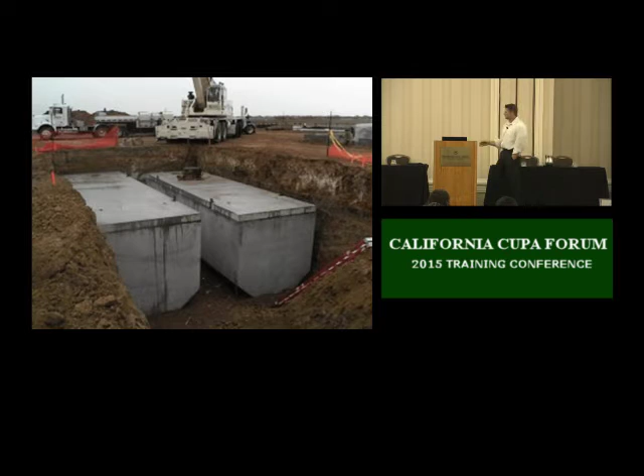So one of the things we want to look for is what it's made of. These are concrete. Can anyone tell me what this is? This is an underground storage tank. When you look here, this is the ground. These are buried tanks. Now, how big do you think these tanks are? I think they're about 2 million gallons.

Do you know what's stored in these underground storage tanks? Not jet fuel. Jet fuel is so much more mundane than this stuff. What is this? Nuclear waste. These are nuclear waste tanks.

Underground storage tanks, about 2 million gallons each. And they've only leaked, there's 174 tanks, I think, like this, in this one area. About 174, each about 1 to 2 million gallons, and they are all full of highly toxic nuclear waste. But out of all of it, they think they've only lost like 4 or 5 million gallons released. And it might sound funny, but it's 100% true.

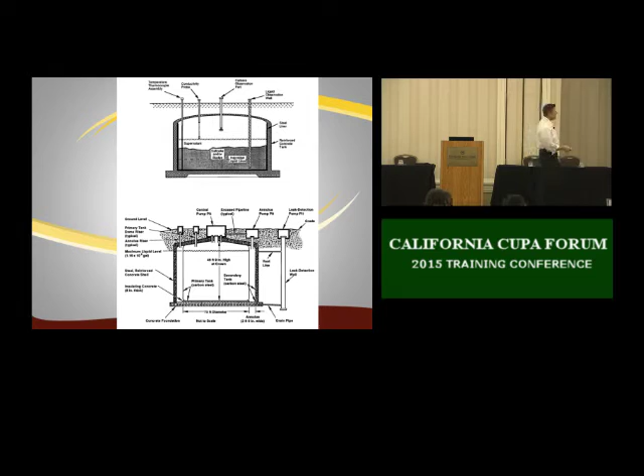One thing you need to look at when we're talking about underground storage tanks is why do we have these regulations? Because of things like this - and it doesn't have to be highly toxic nuclear waste, it could just be oil and gas, but they leak. They get into the water supply, people drink it, people get sick. Any questions? All right.

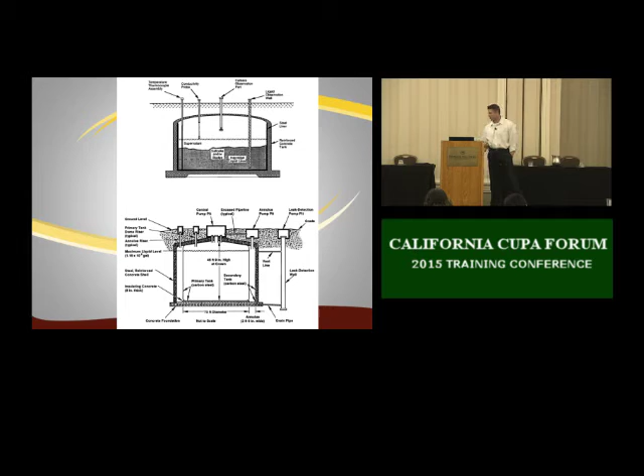So now here's our little diagram. We're going to go over components of everything. So right now we've talked about underground tanks, we talked about the reason we're here, we're talking about what we're going to look at now.

Now we're going to look at more tanks, apparently. Okay, what kind of tank is this? Steel tank. How do we know it's a steel tank? Because it says steel tank. What else? No ribs and flat ends. Okay, so it has flat ends, there's no ribs on it. That's great when you put the tank in the ground.

However, when you go to a new site and you look down, how do you know what kind of tank's in the ground? You trust what forms? The tank forms - never, ever, ever trust a tank form. Okay? If you ever trust your tank forms, you should be let go, you should go do above ground tanks instead. They are like 85% wrong every year.

So if you go to a site that's in the ground, you can't see flat ends - how do you know this is a steel tank? When it's buried and you can't see flat ends, how do you know when you're looking in the hole down in the ground that it's a steel tank? Do you trust your tank forms? No? Thank you. How do you know? Well, that's a whole separate issue - how do we know this is steel?

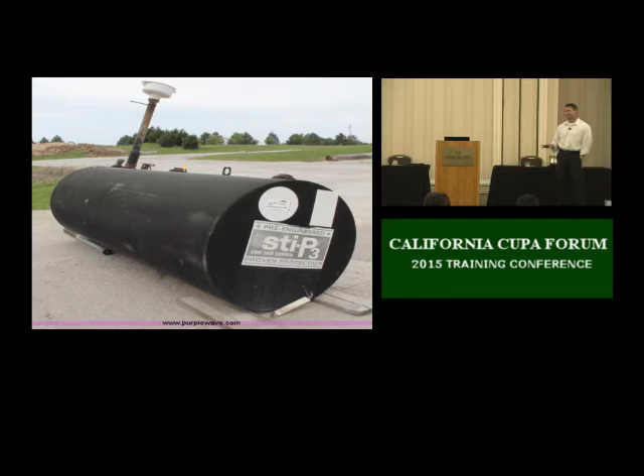Glasteel tanks. This is a Glasteel 2 tank. And what's the difference between a Glasteel 2 and a Glasteel 1? Who can tell me? Or do we even care? Glass steel, there's 2 different kinds of tanks. There's a glass steel 2 tank and a glass steel 1 tank. What's the difference? Some of my senior people, what is the difference? Before I start calling you out, and I will start calling you guys out. You guys have been in my class for years. I've talked about this many times. What's the difference between Glasteel 1 and Glasteel 2?

One of them has a steel primary tank and a steel secondary tank. One of them has a steel primary tank and a what kind of secondary? A jacket tank, a fiberglass jacket. Okay? Why do we care?

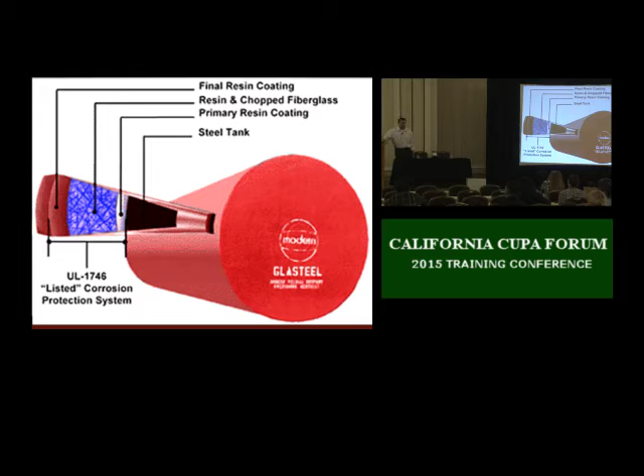Corrosion, because on the one with the secondary tank that is steel, it has corrosion prevention, but it also has a wrap around it, so it doesn't matter, right? Because the steel tank, the secondary steel tank, has a fiberglass wrap around it, so that is the corrosion prevention method. However, when that tank comes on site, what do they have to do? They have to do a holiday test. And with a jacketed tank, they don't.

Okay, what is a holiday test? Who can tell me what a holiday test is? It's a test to determine if they have complete protection. And how does it work? Yeah, it's a corrosion prevention method test that shows, hey, do you have any holes in the jacket or the fiberglass wrap? How do they do it?

They run a squeegee. It looks like a giant squeegee with metal. They put about 20,000 volts across it, and they're supposed to cover the entire area of the tank. But this particular squeegee, if there's a spark, they don't have a good— Ah, there's the big word. What's that big word? Spark test. So you're taking a tank that has fuel in it and you're sparking it to make sure there's no holes in it. Better not have fuel in it when it's delivered. What was that? It better not have fuel in it when it's delivered. Very good. This tank has not had any hazardous material or anything volatile in it, so you're good.

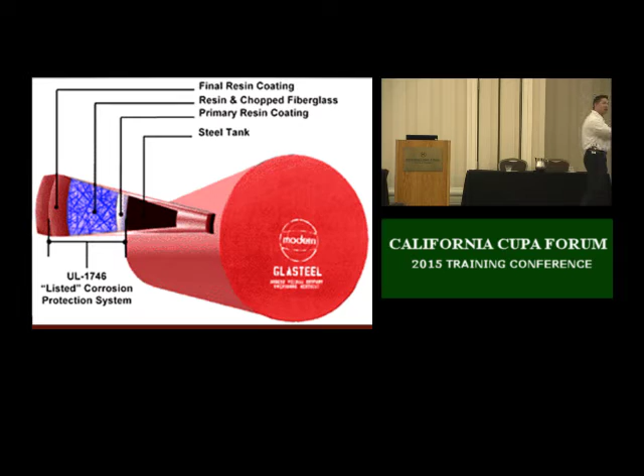You're very good. Yes? Another thing, I think that tank, that double-wall steel tank, it's in the Enviro 16. There is one like that too, but on Glasteel, there's Glasteel 1 with Glasteel 2s. There is a different, that's a whole different company. There is though, you're right. Modern makes an Enviro, it's Enviro 16. It's a double-wall steel. Okay, I have to check on that. I have to see if they changed the name. All I know is I know the glass steel 1, glass steel 2s, there's a difference. Okay, but they could have changed the name or may have another one that's Enviro. I have to check on that.

Now, going back to some more things about a spark test. When do we see spark tests at different places? When's another time we see a spark test? With underground storage tanks. Lining inspections, lining inspections. And we're not going to talk too much about lining here, but understand this.

If you have a single wall steel tank that had a liner put in, okay, what's a liner? It's where they cut a hole on top of the tank, they go inside and they spray this blue stuff or this green stuff inside the tank. Okay? The first 10 years, you have to go do a test, and every 5 years after that, you do a test. And they have to run a series, I think, 8 tests.

And one of the tests is they go inside the tank. Some guy goes inside the tank, and they do a holiday test around the liner to make sure it has no holes. Now think about that. You're going into a tank, into the hole in the tank. You're going inside this tank that already did have hazardous materials in it now, and you are sparking it to see if there's any holes.

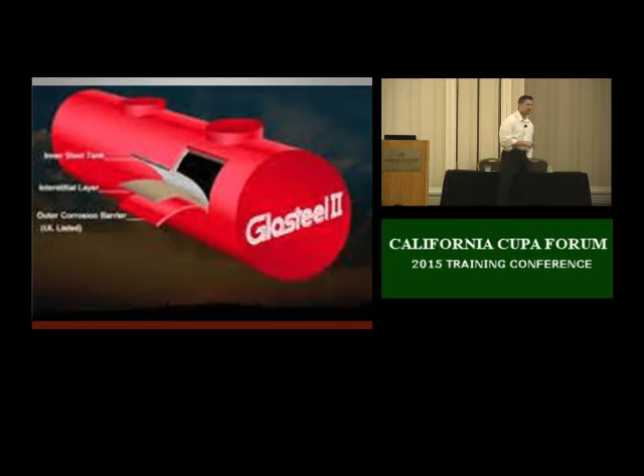As we get closer to this 2025 single wall tank removal requirement, this is what you're going to see.

Is there anyone from San Joaquin County in here? No? Well, if you are, you don't want to be singled out. Okay, you know how many single wall tanks are in San Joaquin County? Zero. Why?

They removed them a long time ago. In what do we call it? The 98 upgrades. How many of you guys know what the 98 upgrades are? And for you young kids in there, that was 1998.

As a side note, I came here when I was like 24, 25 years old, and I saw these old people up here talking about underground tanks and all that kind of stuff. And now, as I've gone more into the industry, I am that old guy up here talking. I look at you guys, you're so young. God, some of these inspectors are so young. So for you young ones, 1998 upgrades, okay?

And what happened in the 1998 upgrades? It said if you had a single wall steel tank, you had to do what? You had to line it or remove it. Okay, and some people said, I want to line it. I said okay, but you also had to do, I don't remember exactly what the citation is, but there's a subpart K that said you have to prove, before you line the tank, that your tank did not what?

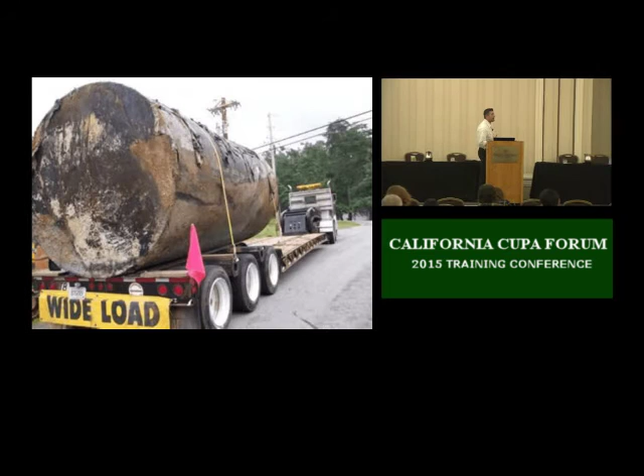San Joaquin, they didn't do that. They took it a lot more literally. They said, okay, you have to prove to us that your tank has not leaked. So you have to uncover the top of the tank and do soil samples underneath the tank. That is why San Joaquin has no single wall tanks in their ground.

Because the people who tried soil samples, what did they find? They all failed. There was contamination under 100% of them. Is that normal? No. I mean, it's typical, but I have pulled single wall tanks out of the ground with no contamination underneath. It's rare, but it does happen.

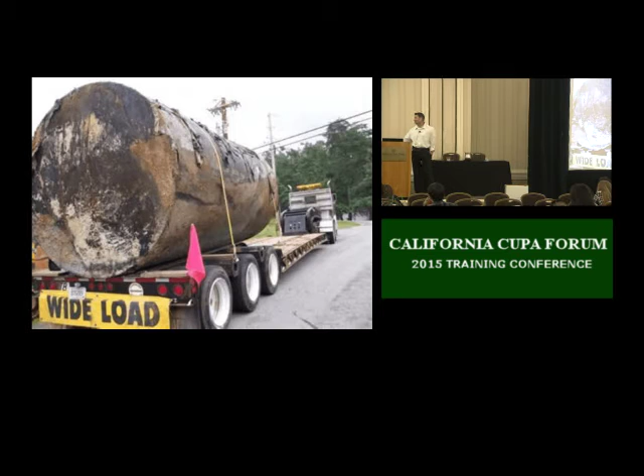It does happen. Typically, when you see more single wall tanks coming out of the ground, you're going to see a lot of contamination, a lot of bad tanks. Okay, fiberglass tanks. This is a fiberglass tank.

We need to move on a little bit. So here we go. How do I know this is a fiberglass tank? It has rounded edges and it has ribs. Okay, now when this tank goes in the ground, how do I know it's a fiberglass tank? Do I trust the forms?

No. Say that again? No. There we go, no, you don't trust your forms. So how do you know? You look inside the hole and you see what? You see ribs. We're good. What else do you see?

Wraparound sensor, or what's the third thing you can see? Hydrostatic sensor, hydrostatic liquid. Any question with that? Should you have hydrostatic monitoring on steel? Why? Because it corrodes.

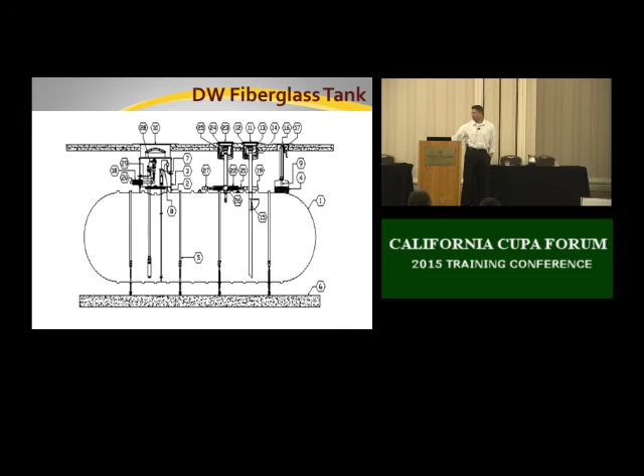Double wall fiberglass tank. Now this is a compartmentalized tank. Understand that when you have two tanks that are compartmentalized, or two different sides, I don't care if this is 87, 91, diesel, whatever. How many regulated tanks do we have here? Two. We have one full tank and two regulated tanks.

Any questions? How big is your interstitial space on a fiberglass tank? An eighth of an inch? Yeah, something like this big. Your secondary containment is about this big on a fiberglass tank.

Have you guys ever gone and taken a tour of some of the fiberglass tank manufacturers? You should if you have not. If you are an owner or an operator, or an inspector, you should set up a tour and have them show you how these things are made, because your tank knowledge will greatly increase.

How do they make this compartmentalized tank? They make a full tank here, they make half a tank, and they just attach it over. Then they take the secondary tank and wrap a secondary tank around both.

What about the ribs? What are ribs? Reinforcement. Why do they have the ribs? For structural support. You put 30,000 gallons of gas in a fiberglass tank - what does the fiberglass want to do? Blow apart, it doesn't have the structural support. You put these ribs around it, and it gives it the support it needs.

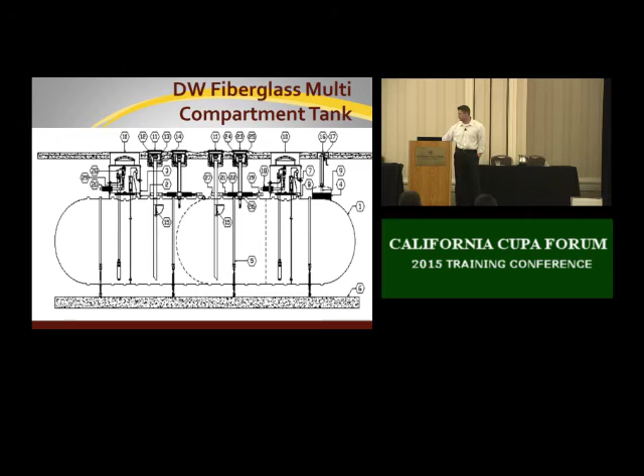All right, so now we're going on to piping. Now we've done with everything with tanks, we looked at everything with tanks. Now we're going to piping. Let's go back here, there we go.

Fiberglass piping - we know when it's in the ground, it's straight. It has 90s, it has 45s, it's rigid fiberglass piping. Any question with this? Typically it's what over what? Fiberglass over fiberglass. What inch over what inch? 3/2. Can be bigger, can be smaller, typically 3/2.

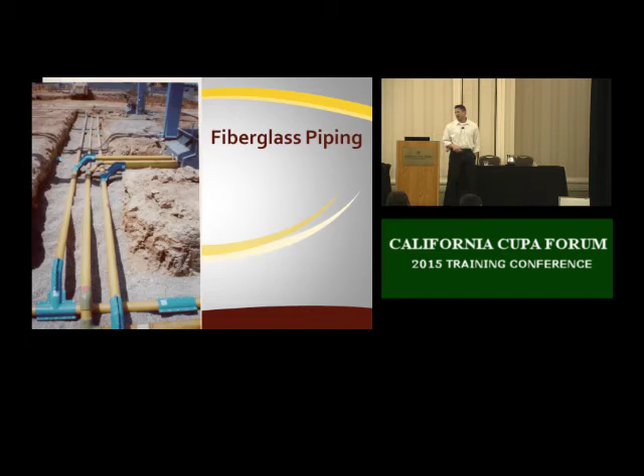Flex pipe - you notice on flex pipe there are no 90s, no 45s. It's just wound about. Now when you're installing this stuff, what do you need to know? What the bend radius is.

Understand what the bend radius is. What's the bend radius? What does bend radius mean? This right here, we're at about a 90% bend radius, right? Is that allowable? Maybe, maybe not. Who tells what's allowable? The manufacturer. Should you check that? Yes, you should check that.

I see this all the time, things that are over 90% or 90 degrees. I see over 90 degrees all the time. You have to ensure this, because once this is covered up, no one will ever know again. When you're installing this stuff, make sure you check your bend radiuses. It's something I see wrong all the time.

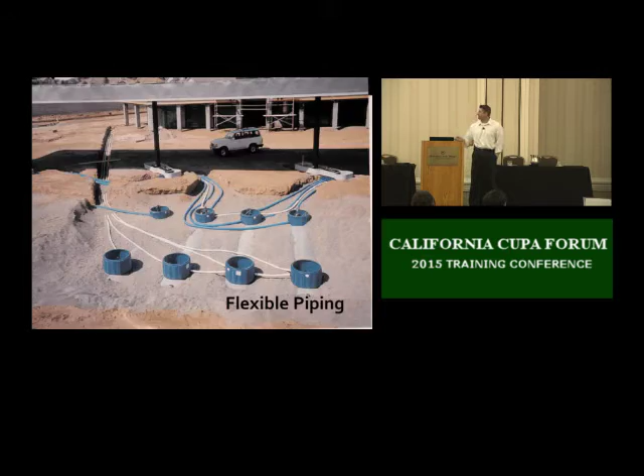All right, this type of system - who could tell me what kind of piping is this? Flex pipe. And what's a special kind of flex pipe is this? What's this system called? The loop system. Loop system. Why is it called a loop or referred to as a loop system?

What's the difference between this and this?

Who can tell me? They're daisy chained together. You have it coming off the sump into the dispenser. Here, you have it coming off of 1, going into dispenser 1, teeing up, going outside the other side of the UDC, and going straight to dispenser number 2, where it tees up, goes into the dispenser, and goes to number 3. So all these UDCs, all these lines are one looped system.

One looped system. Does that make sense? Why is that important?

How you regulate this, and I'm not going to get into too deep, versus how you regulate this, are totally different. They're both flex pipe, but it's regulated totally different because you have this piece of pipe that goes from dispenser 1 to dispenser 2, and another piece of pipe that goes from dispenser 2 to dispenser 3. Because of those loop areas, the way you regulate it, whether it be a VPH, a tank installed after July 1st, 2003, or a non-VPH, you regulate them totally different.

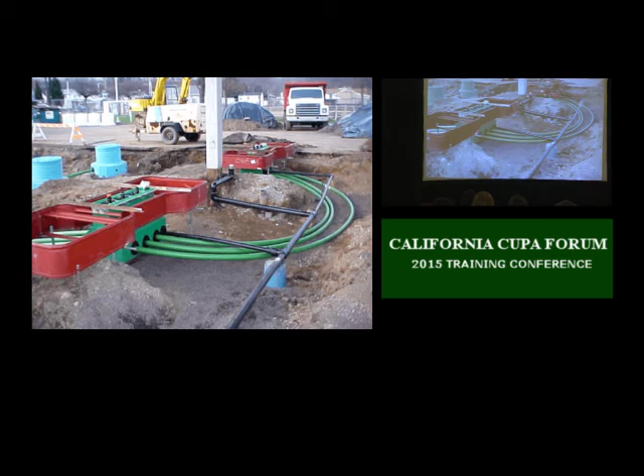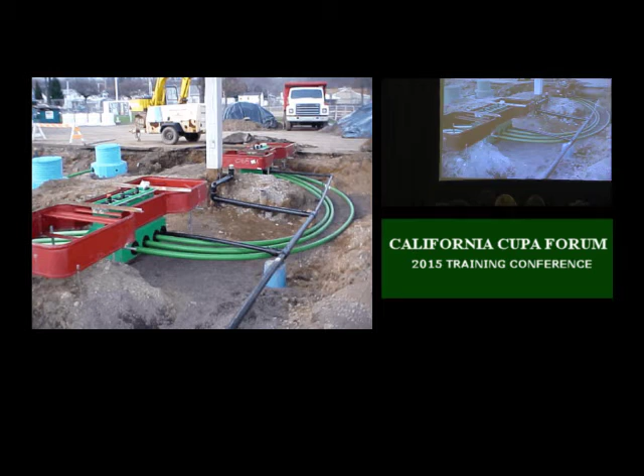Okay, so you need to know where the flow is going, you need to know where the angle is going, you need to know which one's doing which. But these have to be positive shutdown and fail-safe to meet that requirement. Any other questions? Did I lose anybody? I know I lost my beginning people, but for my more advanced people, did I lose you?

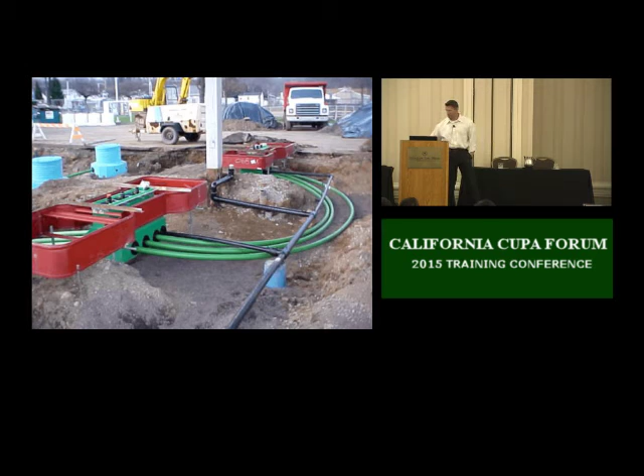All right, what's this called? Trench liner. Should you have this? No. If you have it, remove it. It is illegal, it is illegal, it is illegal. Any questions?

Should you see this in the field? No. Are you going to see it in the field? About 8 of you will, because I know of 8 sites still in California that have this, and it is over 11 years non-compliant.

What's a typical fine for violations on underground storage tanks? $500 to $5,000 per day per tank. Okay, say this is a typical 3-tank install. You go minimum, so $500 a day minimum, 3 tanks at $1,500 a day for 11 years. How much money is that?

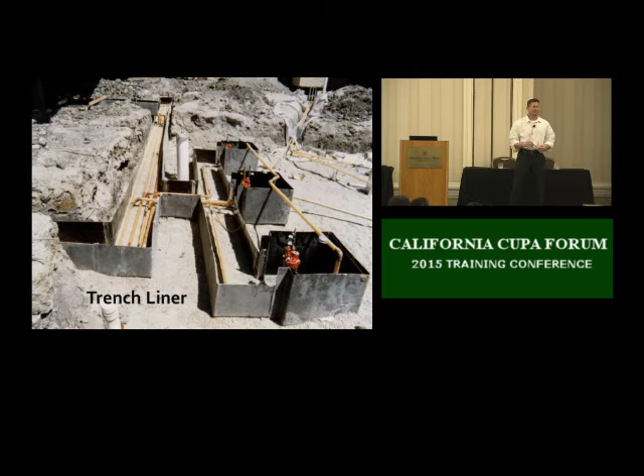Now, if you're local, I know people say, well, my local is fine with it. Okay, that's fine, you got a grace period. However, who can come in and still do a case against you? The feds? Well, actually, it's not a federal requirement, so they can't. The state can. And what do they say? Oh, my local said it's fine, they signed off on it, it's all good. And the state says, yeah, that's nice, however here's your $6 million fine for 11 years at $1,500 a day. Locals cannot give you an exemption for a state requirement.

Now, more piping. These are sumps. Why do I call them piping? Because they are piping, they're big pieces of pipe. Don't think of them as sumps, think of them as 48-inch pieces of pipe, because that's what they are. They are big pieces of secondary pipe. Any questions?

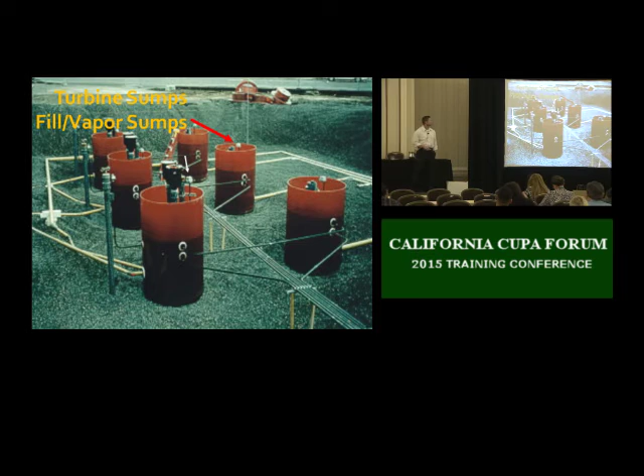When I started with Sacramento County, they didn't give me a lot of training, so when I went to my first site, I just watched what the service tech was doing, like, oh yeah, everything's good. I went to my first suction system, and there was no turbine. I talked to the service tech, I'm like, hey, so where's the turbine? And he goes, well, there's not one. I'm like, oh, okay, that's great. Then I'm like, so how is the pressure working? He's like, it's a suction system. I'm like, okay, great. So then I call the other 4 people on the team, and I said, what is a suction system? What are the requirements of a suction system? And they're like, we'll talk about that when we get back into the office.

So I go back to the office and I bring one of our senior inspectors. I said, what's the requirements of a suction system? What is a suction system? And he said, basically, it's where the fuel gets sucked instead of pushed. I'm like, okay, that's great, thank you. So what are the requirements of a suction system? And he's like, well, let's look. So they broke open the regulations, and they're like, no. Basically, because they had dealt with everything that my team typically dealt with, which was major oil, all double wall pressurized. They had 4 people doing major oil, and they gave me the whole county that was not a convenience store. So I had backup generators, construction sites, everything that was not a major oil site. And I came across a lot of these, and I had to kind of teach myself, and I hooked in with 4 or 5 really good service techs and had them teach me what to do.

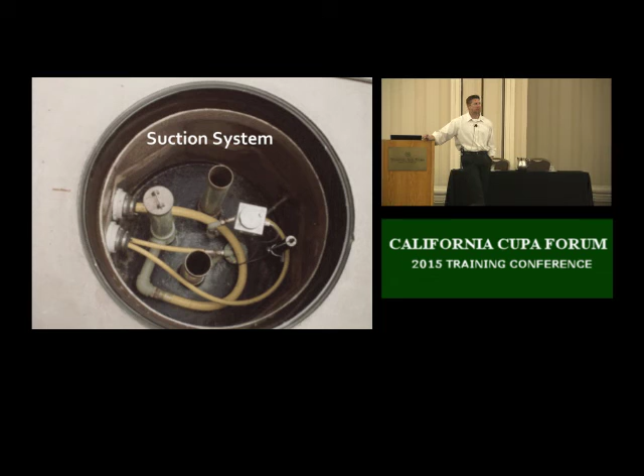Any questions with that? What happens if this was a conventional suction system? Say this supply line here is conventional. Do you have monitoring requirements for it? Yes, you do. Do you have to do secondary containment for it? Yes, you do.

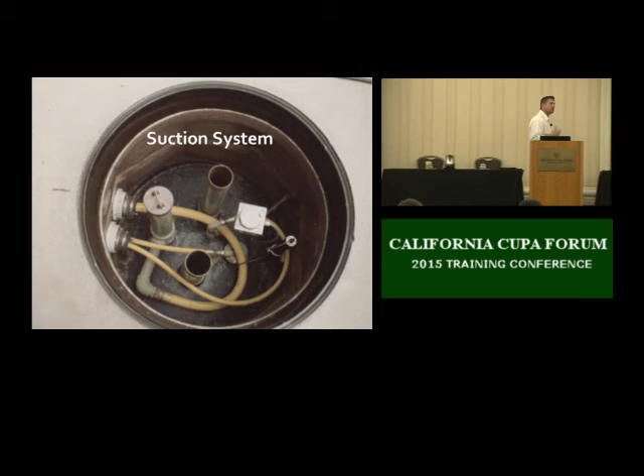So now if I'm a backup generator with a conventional suction system with a return line, and I want to get out of secondary containment testing because I know I'm going to fail - I'm a big corporation with a lot of backup generators, 90% are going to fail - what do I do? I pull out the foot valve or inline check valve of the conventional suction system. That makes it safe suction. I remove the return line, and now I've taken a double-walled conventional suction system that required secondary containment testing and turned it, with those two steps, into a safe suction system with no return line and no secondary containment testing. Boom, I am done. Is that a lot cheaper? It's a lot cheaper. Any questions?

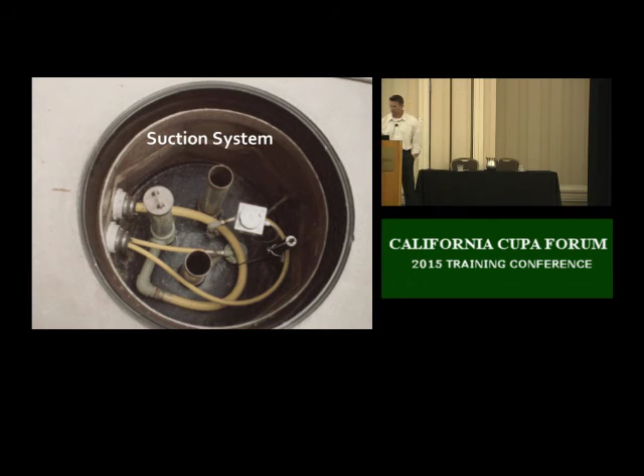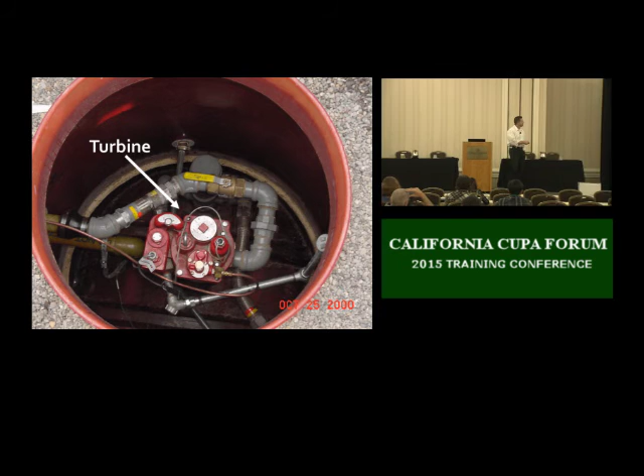How do I know this is an electronic line leak detector? Because I trust my forms? No. Then what? Because it has a wire going to it. If it's a mechanical line leak detector, there's going to be no wire.

All right, so now we've done tanks, we've done a little bit of piping. Now here's more piping - what kind of piping is this? Move, tell me real quick. Double wall, fiberglass, rigid. Okay, double wall, fiberglass, rigid - that should have popped in your head the first thing you saw.

What is this thing right here? Test boot. What do we use test boots for? For testing. I like that. Yes, for what kind of testing? Secondary containment testing.

Now, before 2001, 2002, 2003, if I saw this on a system, I would say, what are you up to? I go to the owner operator - you are messing with my system. Why do you have that boot there? Cut that boot off. Cut that thing off.

Why? Because there's no need for it. There was no need for this testing boot. The only thing you could use that testing boot for was to put it on this piping and then have no monitoring. Does that make sense? Back in those days, there was no need for this boot except to mess with the system by putting this on here and isolating that pipe.

So my sump sensor here never got activated. Does that make sense? So if I saw this back in 2000, 2001, I'd go to the owner operator and I'd have a little talk. Hey, what's going on with my system? Why do you have this boot here? You're messing with my system. As soon as I leave, I know you're putting that thing back on. Okay? Why does every site have them on now?

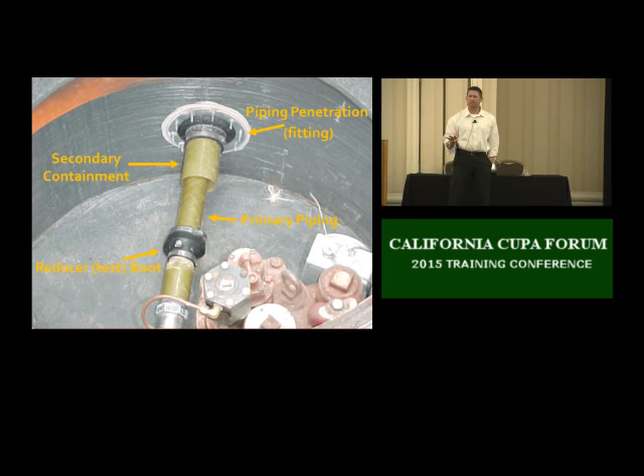They go back and look down, and the fishing bobber has moved one circle. Is that a pass or a fail? It's a pass. I think three circles is a fail, correct? Two or three circles is a fail, something like that. And you know, I've looked at that system - it's a very, very accurate mechanical system.

But there's a huge room for error. And what is that error? What's that over here? You don't look in the same spot. Your feet have to be exactly right here, your head has to be exactly at the same angle, you have to be looking exactly straight down.

Now going back to my service techs and their per job mentality - Friday afternoon, it's hot, you're in Imperial County, it's like 120 degrees, right? You want to go home. Now let's say three circles is a fail - I don't know if it's two or three, but let's say three circles is a fail. He looks back down after an hour of testing and sees it moved 3.5, 4 circles. That's a fail.

Now what do they have to go do? Go back and look, try to figure out what's going on. Unless you go like this.

And you move back a little bit like this. Now that 4 circles has become what? 3 circles. And what do we got? We got a pass, right? Boom, we're out. We pass, we're good.

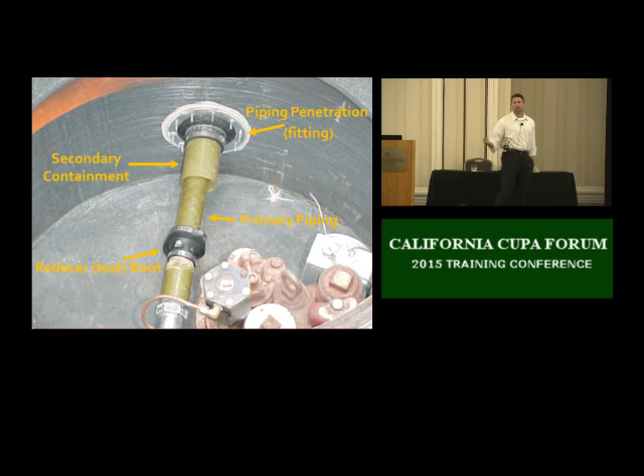I'm out per job. So is what my owners here saying true? Sometimes is it service techs who leave these kind of things on to benefit them? Do they accidentally leave sensors strung high because they forgot to put them down for the monitoring system? Is that a true fact? Yes, it is.

How do we know if it was tampering, deliberate tampering, or if it was accident? We don't know. And that's why when you throw the word tampering out, you better be good for a regulator. You better be understanding, because once it goes into tampering, it goes from $500 to $5,000 per day per tank to what? $5,000 to $10,000 per day per tank, and/or a year in jail. It actually goes criminal. So when you throw that tampering word out, you better have proof of who did it.

If not, is it still a violation? Yeah, it's still a violation. And owners say, John, well, they left it down. And I say, well, owner operator, I'm sorry, but it's still your job. It's still your responsibility. Your contractor came in and did it, left it high, left the boot on. You got to face a fine for it. But once you go to tampering, it's a whole nother level.

Some of your old systems had no idea about secondary containment, no thought about it at all. When I was starting in 2001, I went to a symposium at the State Water Board. The State Water Board came up to the podium and said, we're going to require secondary containment testing for all secondary components. Everybody stood up - regulators, industry, owner-operators. I know a regulator who stood up, red-faced, and said that is the stupidest, dumbest requirement I've ever seen in my life. Why could you do that? And just totally berated the entire program.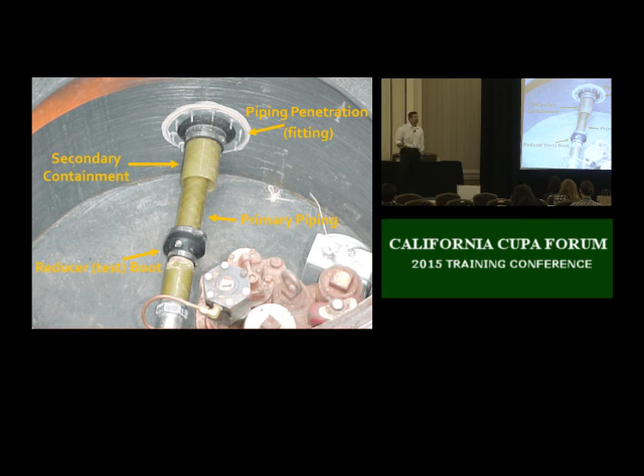When you do your secondary containment test, when you do your monitoring system certification, you need to tell your service tech to go in there and make sure that Schrader valve is down and there's nothing inside. Now, do you physically go down there and check? You want to, you can. I'm fine with talking to the service tech - can you make sure the Schrader valve's out? He goes down there, says yeah, it's out. I'm good with it, I take their word for it. But it's up to you. That's 100% legal, 100% legal.

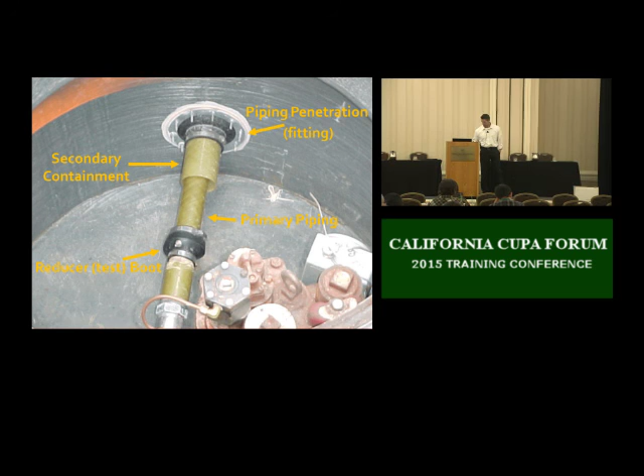Yes, go back to you. I was just going to say, if you are an owner, you really do need to check on your service techs to make sure they're not being sloppy. I agree, 100%, 100%. This goes with service technicians and for designated operators.

Designated operators, okay? Who has authority - and again this is kind of going above, but I like the discussion - who has authority over a designated operator? The person who signed their paycheck, which is who? The owner-operator. Does a regulator or an inspector have any authority over a designated operator? No, not one thing, not one thing. Unless you can prove that the designated operator tampered with the system, because on tampering it says any person. So unless you can prove the DO tampered with something, then you have no authority over it.

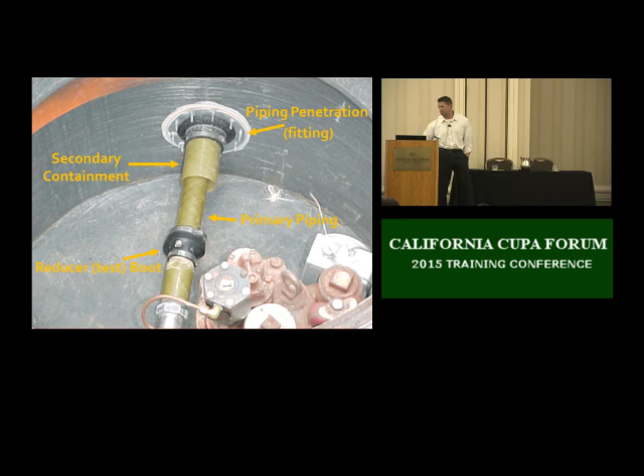So as an owner-operator, I 100% say yes, you need to know your service techs and you need to know your designated operators. Okay, moving on. Line detectors - what kind of line detector is this?

Mechanical. How do we know? No wires, just a copper tube. What is this again? It's a turbine. What's this? Sensors. What's this? Flex connectors.

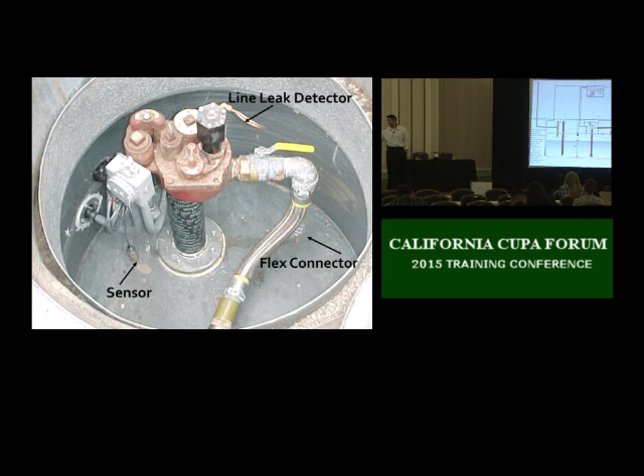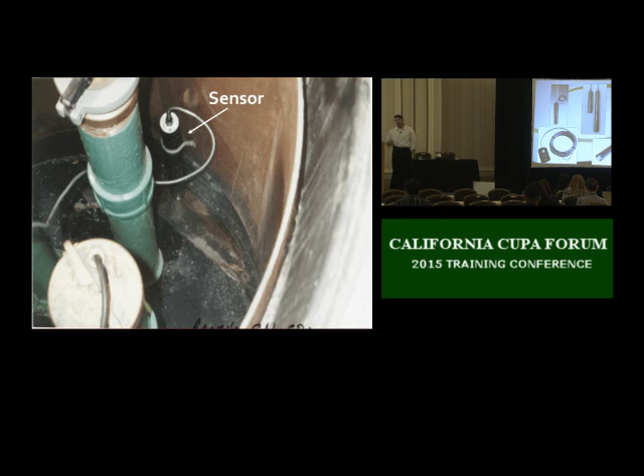Now look here, what kind of sensor? Where do you find this? Sump. What's the difference between these two? Why is one big and one small? Discriminating sensors. This discriminates between what and what? Water and fuel. What is this?

Wraparound sensor. Now, when we get to wraparound sensors, understand, when they pull this out of the tank, do you need to watch it? Do they have to pull this out of the tank? Yes, they do. Do you need to look at the sensor? Yes, you do. Just pulling it up and activating the alarm is not enough. You need to pull out the sensor and check it. Why do you need to check it? Because you need to make sure that it is the right way. If it's upside down, it's not going to work. And we'll talk about that a little bit later.

Has what? A tamper sensor right here. What does that tamper sensor do? You lift it up, it does what? Shuts down the system, shuts down the turbine. Positive shutdown. You lift it up, and now, where is the requirement for that? Where is the requirement to have a sensor, as soon as it's lifted up, to go into alarm or go to positive shutdown?

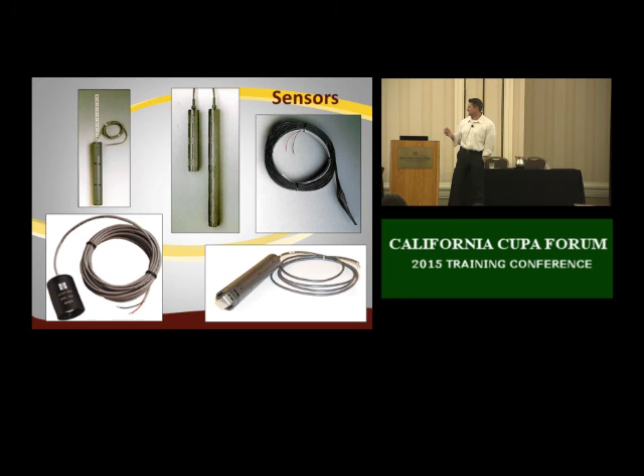So they went to different monitoring companies and said, give me a sensor that will shut down my turbine so my operators cannot do what? What's the term? Lift the sensors. Lift the sensors, right? So industry came out with this. This is an industry thing, it's not a requirement at all. At all. That came straight from industry because they were tired of paying fines for lifted sensors. So now what do they do instead of lifting sensors? They just leave the boot on, right? Tell me that's not the same violation. It's the same violation. Absolutely the same violation. All right, I'll stop, get off my soapbox on that.

ATG, automatic tank gauge, okay? These are inside the tank. There's 2 levels, 2 floats, water float and product float. They tell you how much water and product are in the tank. They're connected to the monitoring panel, and they can be connected to an audible visual alarm for overfill prevention. Automatic tank gauges can do a lot of different things. They can do testing, they can do overfill alarms, they can do tons of different things.

Typical ATG, lay on the ground. Now understand, how do they get this big stick out of the tank and out of here? They take this little piece off here. They disconnect it from the monitoring panel. They lift it all the way out. They make sure nothing spills, right? They lay it down, and then they roll up this, the product float, to about whatever they want to. Do they ever measure? Of course they measure. Of course they make sure that's exactly where they need to go, right? They throw it up there somewhere, and it goes into alarm. Then what do?

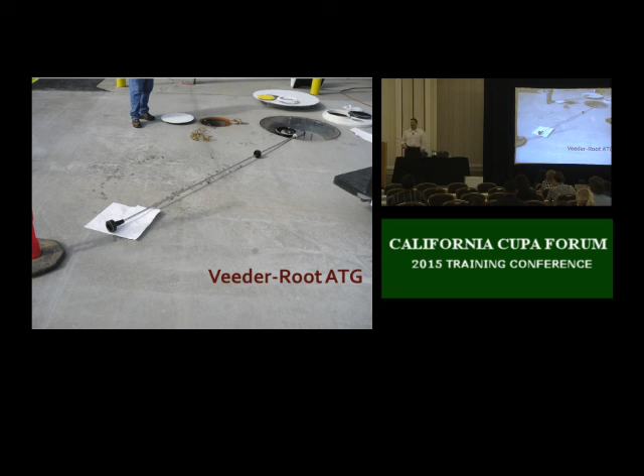You disconnect it again from the monitoring panel, pick it back up, put it back in the tank, and connect it again. All that connection and disconnection from the monitoring panel sometimes has a negative effect on these automatic tank gauges. You can fry them, and frankly, you can fry the motherboard of the monitoring panel as well.

So why do I tell you that? Because as a regulator and as an owner-operator, you need to know when it's required to pull this out and test it, and when it's not.

If this automatic tank gauge is part of your overfill prevention method, like here where it's connected to an external audible visual alarm, then yes, it's required to be pulled out and tested, since there's no mechanical overfill prevention.

If this is your primary overfill prevention method, the one listed on your monitoring plan, then yes. If there are two listed on your monitoring plan, they can test both because you listed both. But if you only list the mechanical, your flapper, then they can't pull this.

That's true, I'm sorry, going back to my tank forms, you're right. If you're listing both, then it's possible you can be tested. If it's not, if you only list the mechanical, then it's not.

But if you, as an inspector, require them to test this and it's not required, who's liable if it breaks? I'm not even saying you might be liable, I'm saying is there going to be a question of liability? Yes, there could be a question of liability.